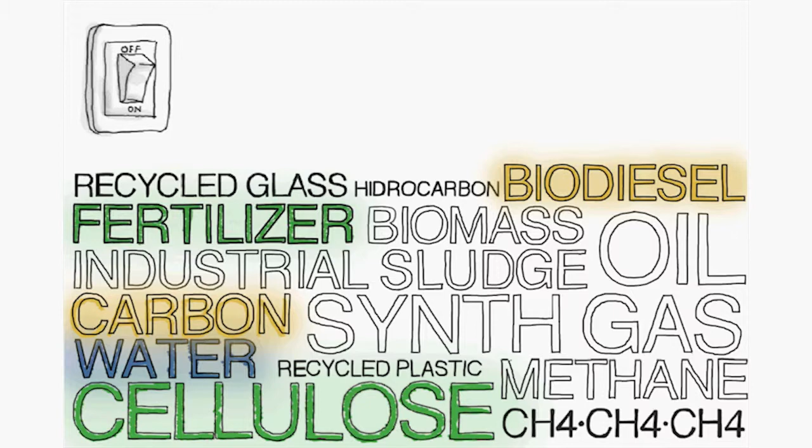InfinitVE proposes a balanced solution: a new design for an industrial plant where state-of-the-art technologies of waste treatment and valorization minimize the final waste delivered to dumping sites, obtaining final products of high energy value, like boosted coal pellets and biodiesel. Through these products, we can generate energy that will be used in the same cities that are feeding back our plants with new waste to be treated.

Investment motivation. InfinitVE, an engineering company specialized in the development of high-value environmental solutions, offers you the chance of sharing a new way to environmental and energy excellence, using the most advanced technologies focused on energy recovery from urban and industrial waste.

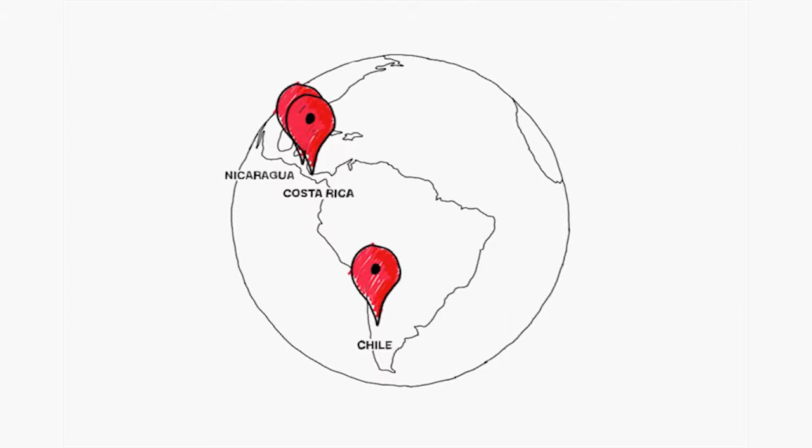InfinitVE is working on the development and implementation of several waste treatment and valorization plants in Europe, in countries such as Holland, Spain, Bulgaria, Romania, Poland, and Germany, as well as projects in Chile, Costa Rica, and Nicaragua. These projects are now in different administrative stages to get permits for the construction and management of the plants, based on our technology, design, and knowledge.

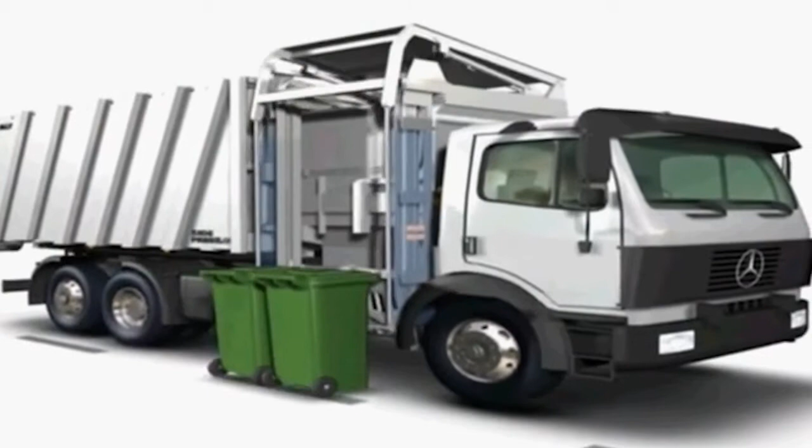Process. The process starts with the reception of waste to be treated in the plant. This waste comes from industries and standard waste treatment plants for municipal solid waste. The input fractions can be glass, organic matter, metal, ceramic and other inerts, wood, and other cellulose composites, polymers, textiles, oils, and non-dangerous solvents.

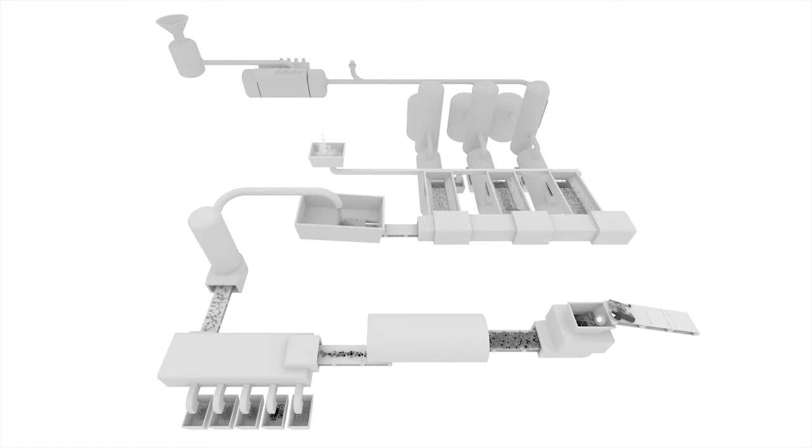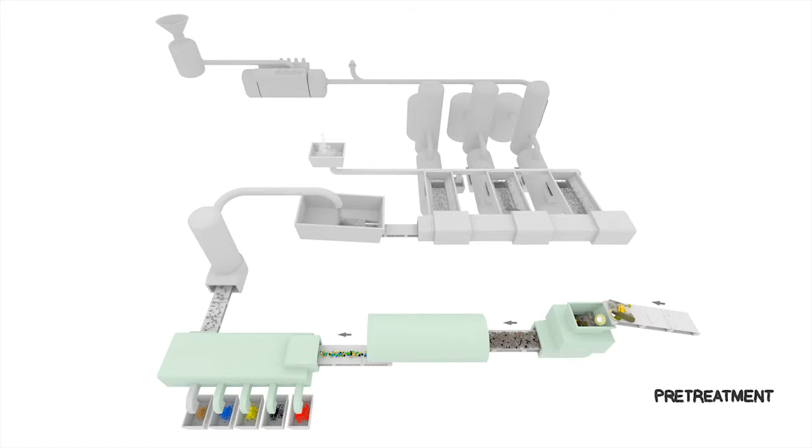The plant is designed to receive any organic waste from any industrial activity, agricultural and livestock processes. The recovery process is divided into 3 different phases. The first phase is based on the pretreatment of the mixed and non-classified waste, allowing us to extract the recyclable fraction following European and American environmental guidelines and regulations. The remaining fraction is transformed to obtain valuable subproducts with high energy content.

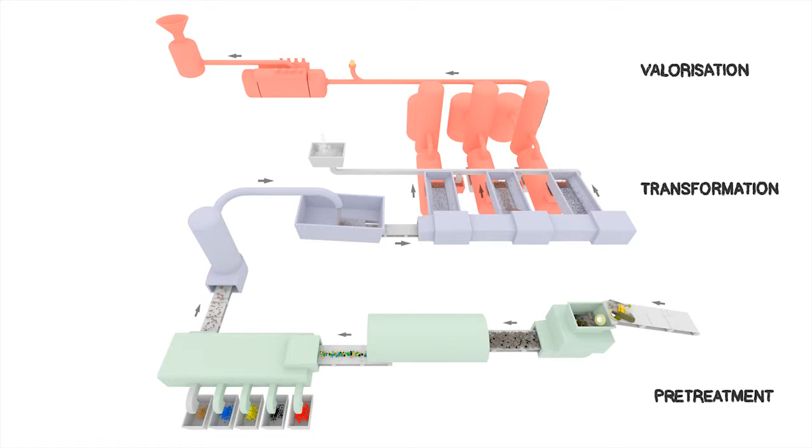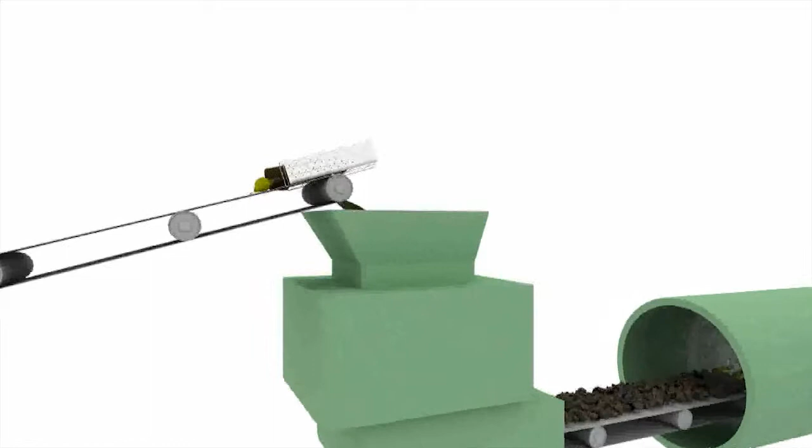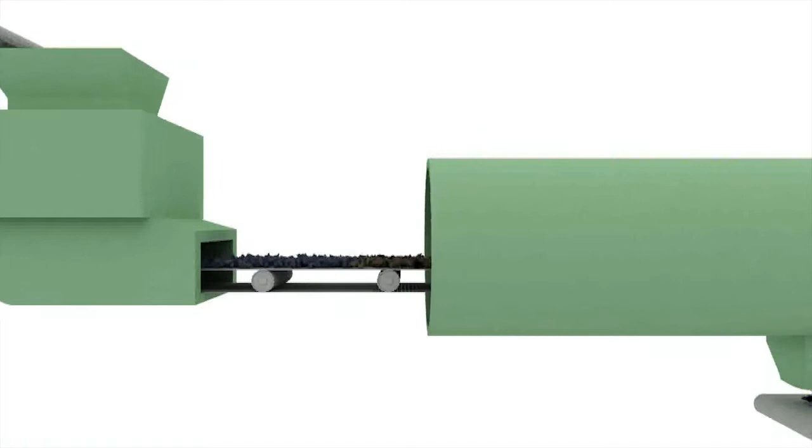The pretreatment process starts with the accumulation of litter in storage tanks that provide a constant supply without gaps. Previous separation of large objects is needed to avoid dangerous situations. Once inside, the mixed waste falls into the shredder, obtaining pieces not bigger than several centimeters, always below 20. After the ripping process, the small pieces go through the cleaning phase.

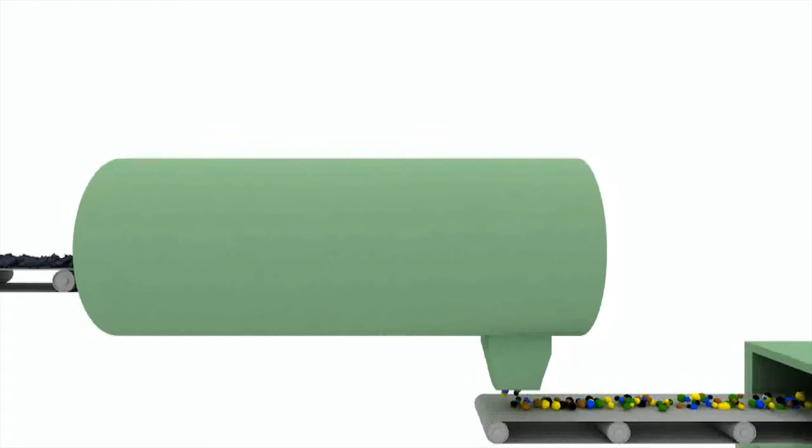Pumping water steam at high pressure cleans the surface of the rubbish and kills any bacteria in the organic matter, dropping odor emissions down to zero. It is important to focus on the fact that it is a closed-loop process, meaning that we reuse water and therefore minimize the consumption of water in the plant.

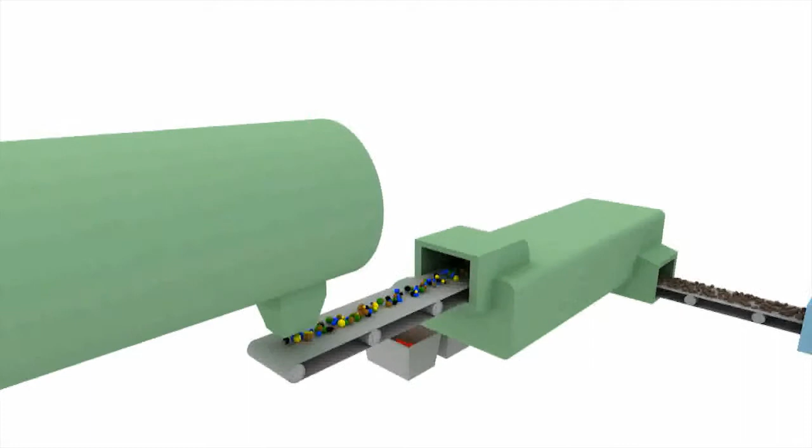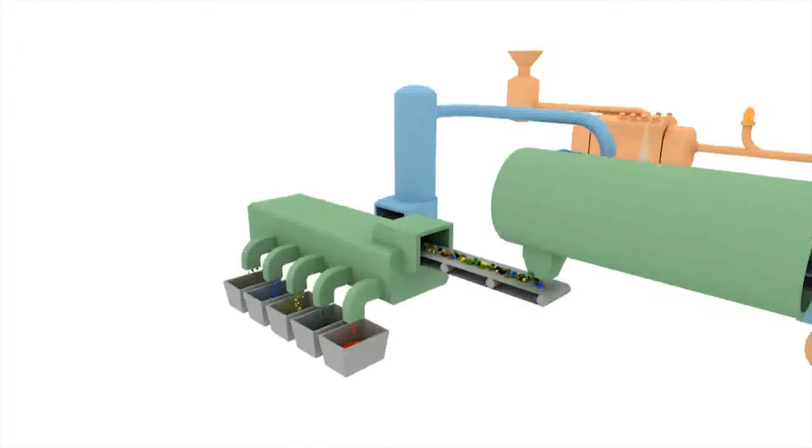Once dried, we reach the classification process of the different recyclable parts by separating metals, glass, and thermoplastics. The mechanical classification processes basically consist of eddy currents for the non-ferrous metals, electromagnets for the ferrous metals, and decantation for the glass and polymers. These recyclable fractions are sold to recycling companies that will reintroduce them into industrial production processes.

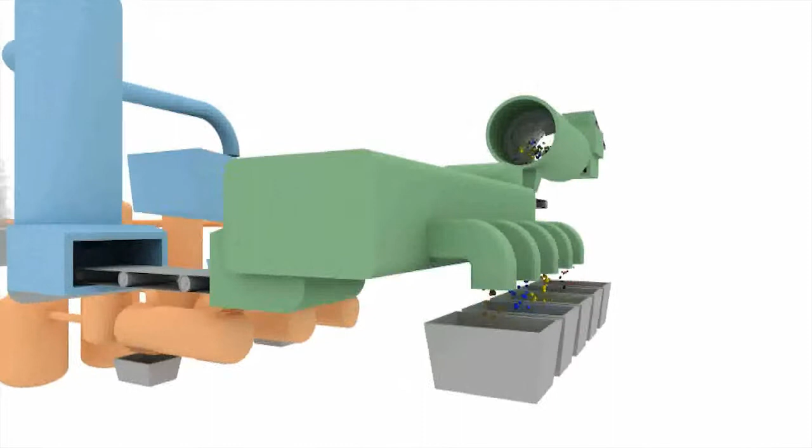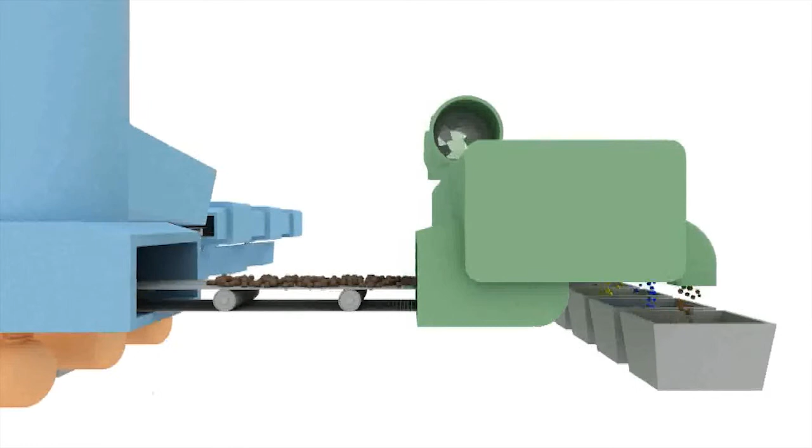The remaining mix, essentially composed of organic matter, textile, and non-recyclable polymers, goes then to the second phase, consisting of a set of transformation processes to convert it into energy-valuable subproducts. The remaining mix of treated non-recyclable waste is introduced into a ripping mill to reduce particle size up to a maximum of 2 cm, identified as particles or waste pearls.

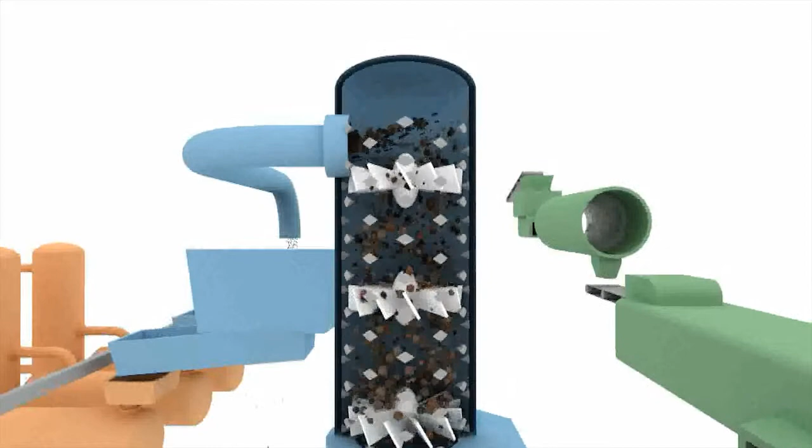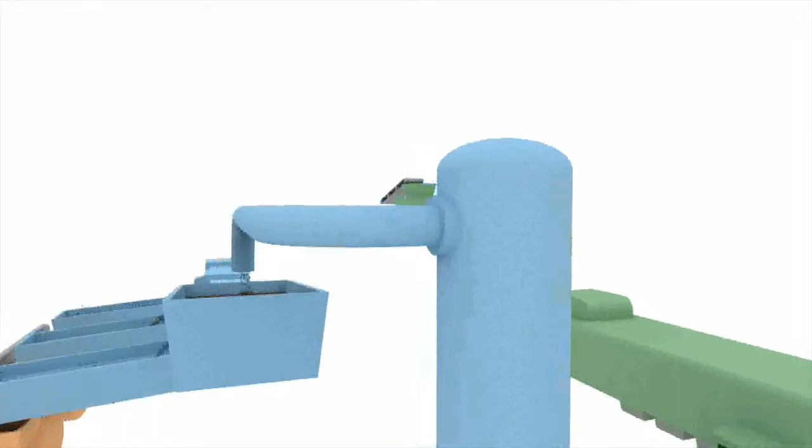The reactor is mainly a pyrolysis and gasification reactor designed to obtain syngas, and roasting for the coal-enriched pellet. Depending on the process, mix, and set of temperatures, a catalyzer may be required to initiate the chemical reactions. Once the catalyzer is mixed with the waste pellets, due to the high temperatures and the absence of oxygen, which are pyrolysis principles, the transformation reactions ignite.

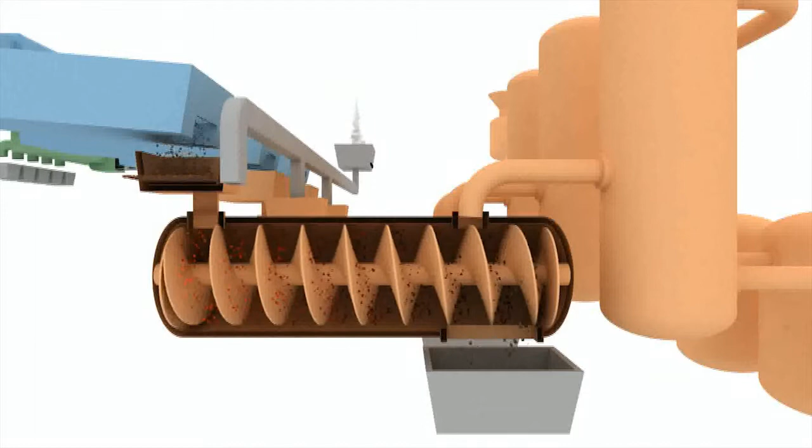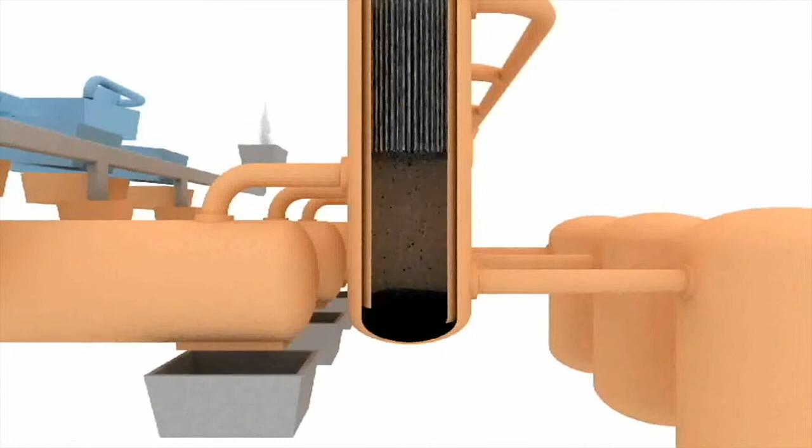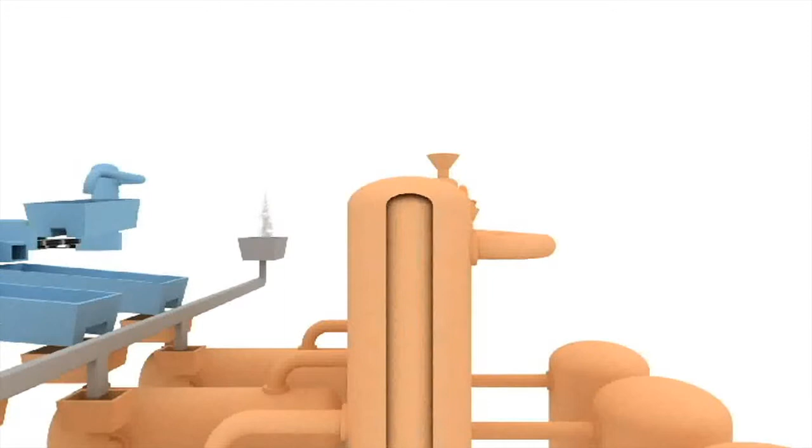From these reactions, we get the energetic subproducts, gas and solid. The solid fraction is recovered and treated for final delivery packing as pellet. The gas fraction is then conducted to a distillation condensation tower, where using a low-temperature system we obtain the liquid subproduct, liquid hydrocarbon.

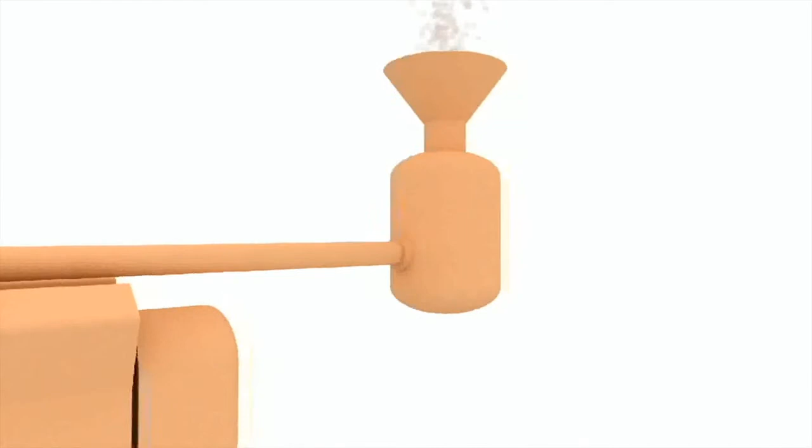The off-gas fraction, mainly composed of methane and butane, is then used as a feeding product for a combustion engine. The engine provides the electricity and the main percentage of thermal energy needed by the plant. Therefore, we can nearly achieve an energy self-sufficient plant. The resulting gases pass through several filters, releasing to the atmosphere only CO2, closing the carbon cycle.